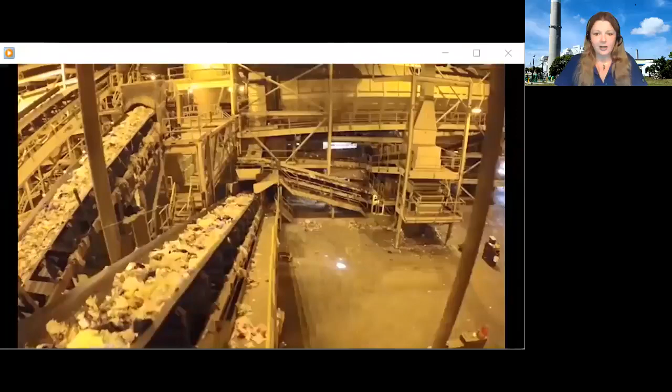Those conveyor belts are bringing it to the flail mill or the shredder. So what's happening here is we're processing the fuel beforehand - that's why it's called refuse-derived fuel. We take out things like metals. We use a magnet to remove our ferrous metals, which are iron or steel, for example, and we use an eddy current system to remove the aluminum material, the non-ferrous materials.

This part over here is called the trommel. That trommel is sorting out very small material, stuff that's less than 2 inches in size - things like glass, dirt, sand, grit, all that stuff we don't want, stuff that's not good material to burn. One fun fact here is since we're processing this fuel beforehand and taking things out like those metals, we actually recover about $100,000 worth of coins every single year from this facility.

Once that material is sorted through and processed, it moves over to the fuel storage building where you'll see that front end loader taking the material and setting it into the boilers.

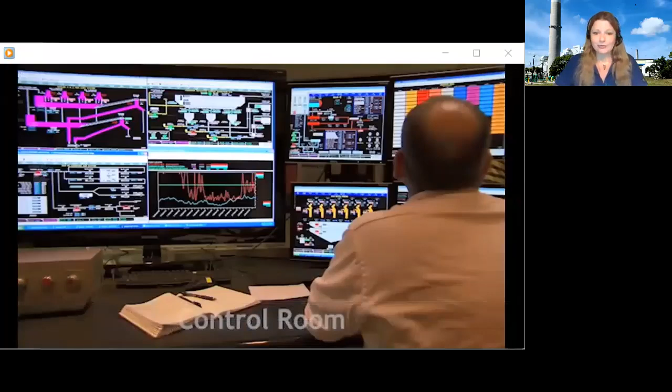Now we're going to talk about the control room a little bit. In this control room, this is where we have our engineers sitting, and they are monitoring thousands of points of data constantly - things like temperature, pressure, steam, our air pollution control systems. That's what they're looking at to make sure everything is working properly.

So then we move to inside our boiler. Renewable Energy Facility 1 has 2 boilers, where Renewable Energy Facility 2 has 3 boilers. Inside every boiler, there's a series of pipes lining the wall, or tubes, carrying water. This fire burns really hot, and the whole purpose is to create steam.

So that water heats up inside those pipes, creating steam, and it's sent to our turbine and generators where we produce our electricity. Between the two facilities, we produce enough electricity to power about 70 to 75,000 homes.

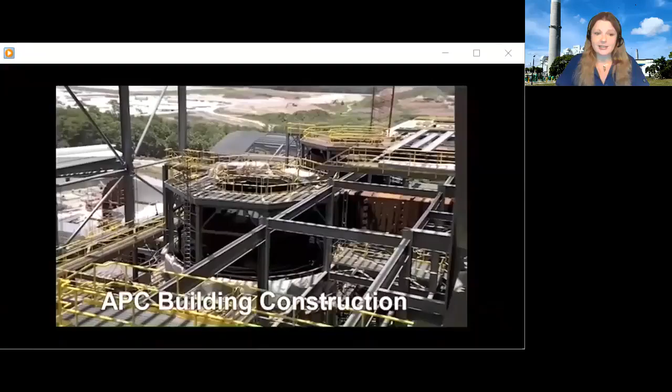This is the construction of our air pollution control systems. Difference between these and the ones at Renewable Energy 1 - these are all inside, while the ones at Renewable Energy 1 were outside. Ash management is where we're dealing with that ash that's left over from burning. And this is just one of the pictures of that spray dry absorber, which is part of that air pollution control.

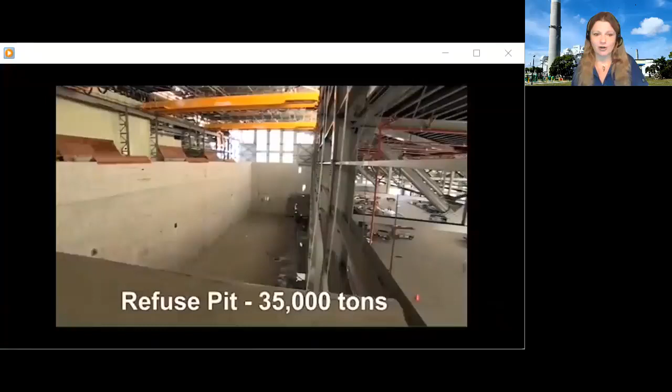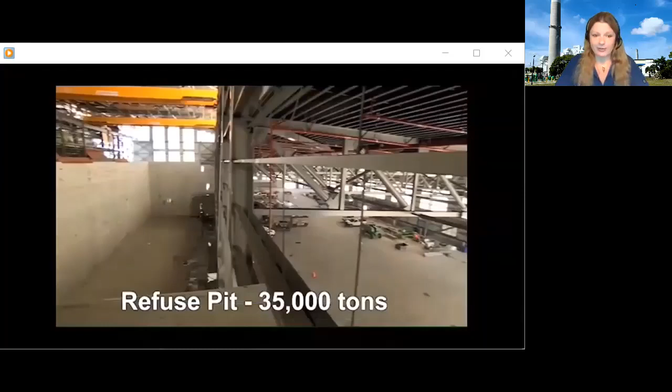So our refuse pit, this is where all that trash ends up going. It looks a little bit different than Renewable Energy Facility 1. This is our tipping floor over here, and remember in Renewable Energy Facility 1 you saw all that trash piled up on the tipping floor. This is going to be a little bit different because this is a mass burn facility - we don't process that trash beforehand.

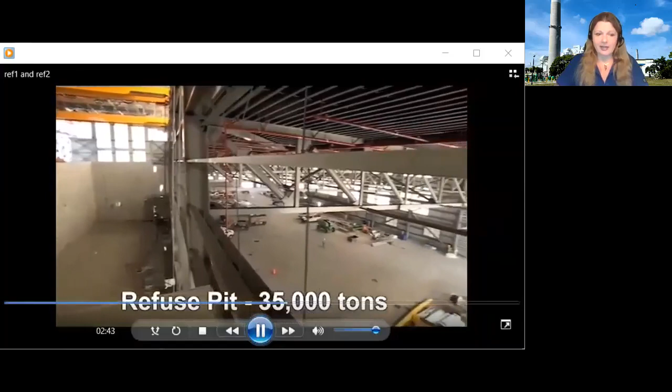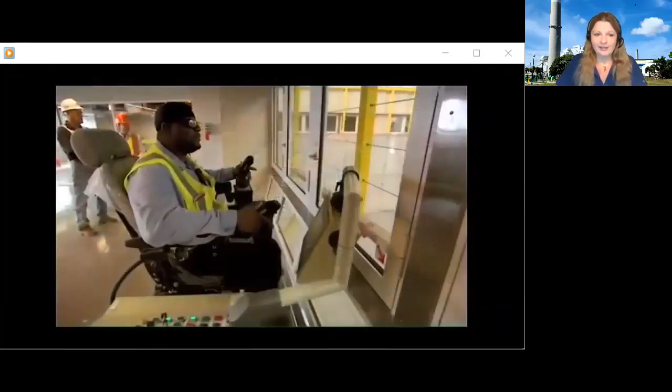From our control room, our claw operators operate any of the 3 claws that we have, and each of those claws can hold up to about 9 tons of trash. That's the size of a T-Rex dinosaur.

Again, in our control room, those engineers are looking at all the data coming in—temperature, pressure, air pollution. They manage everything that's happening in this building. So those cranes will mix and fluff this trash.

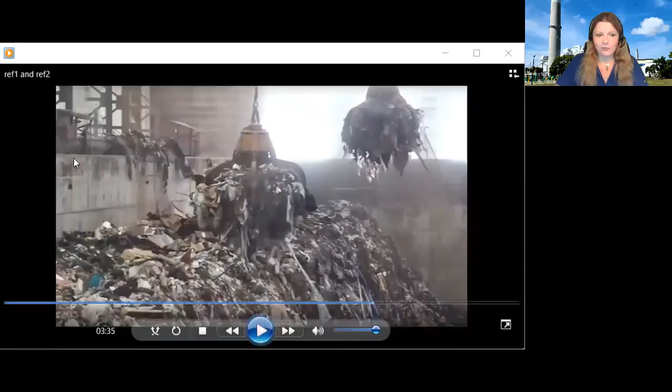Along the top of this wall is the entrance to our 3 boilers, our hoppers. The claws bring that material over to the hoppers and slowly drop it into one of the 3 boilers. Each boiler processes about 1,000 tons of waste a day. So in this facility, Renewable Energy 2, we're processing about 3,000 tons of trash a day. Renewable Energy 1 processes about 2,000 tons of waste per day.

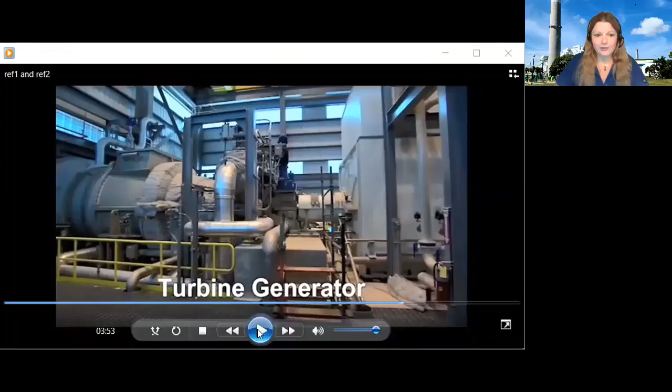Same thing—the boilers are lined with tubes carrying water. That water heats up, turns into steam, and is sent through a series of pipes into our turbine and generator room. This over here is the turbine. That steam turns the blades in the turbine, goes through a rotor into our generator, where we generate electricity.

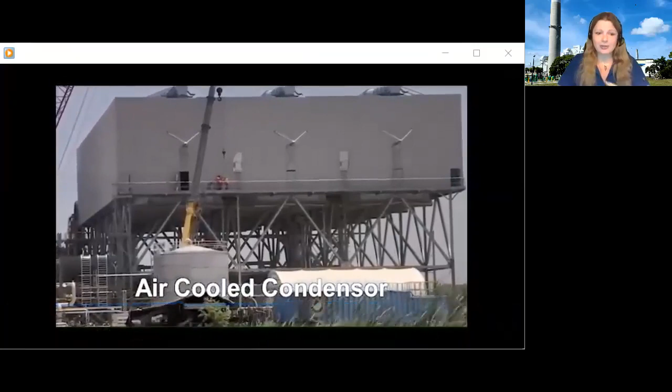We produce enough electricity to power about 70 to 75,000 homes. This is a picture of our air-cooled condenser—a little different from the water-cooled condenser. Here we have 15 of these very large fans, 36 feet across. The steam passes over the top of those fans, cools off, and turns back into water. We treat that water and pump it right back into our facilities so we can use it again.

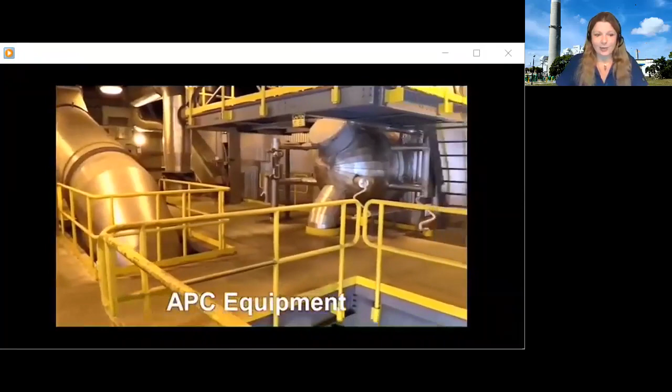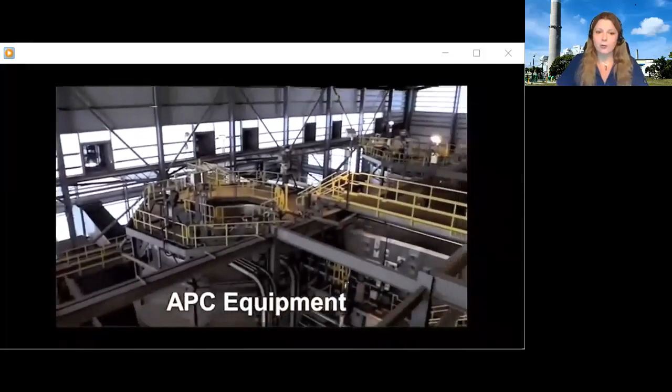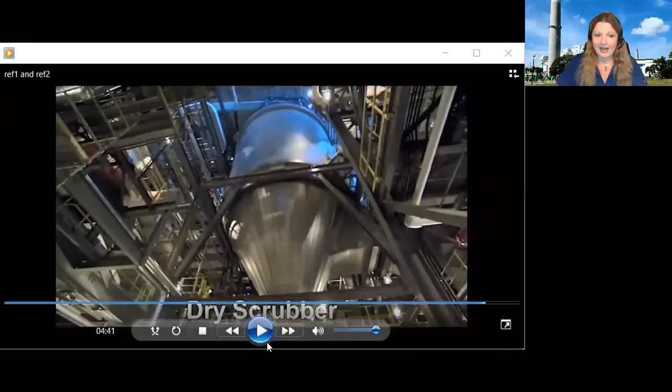Next you'll see our air pollution control equipment. Remember, all this equipment at this facility is indoors, but we have the same stuff for the most part. We use powder activated carbon to neutralize the mercury. We have spray dry absorbers where we insert a lime slurry to neutralize sulfur oxides. Then we have baghouse filters to get rid of particulate matter, and a selective catalytic reductive system to get rid of nitrogen oxides.